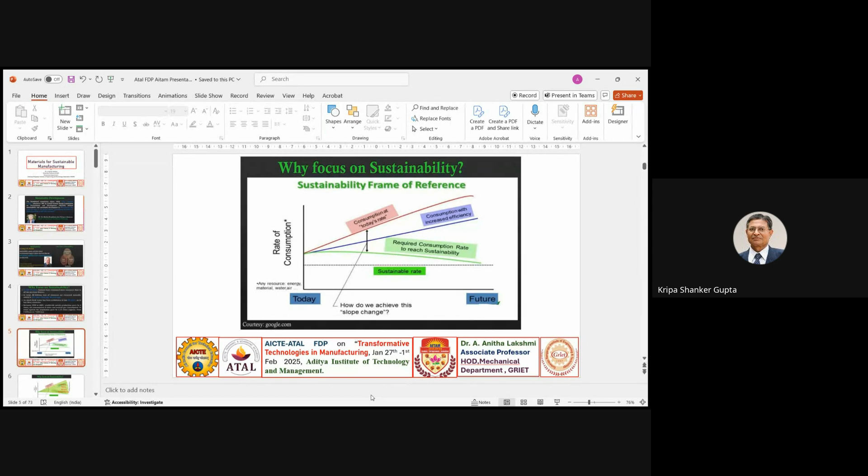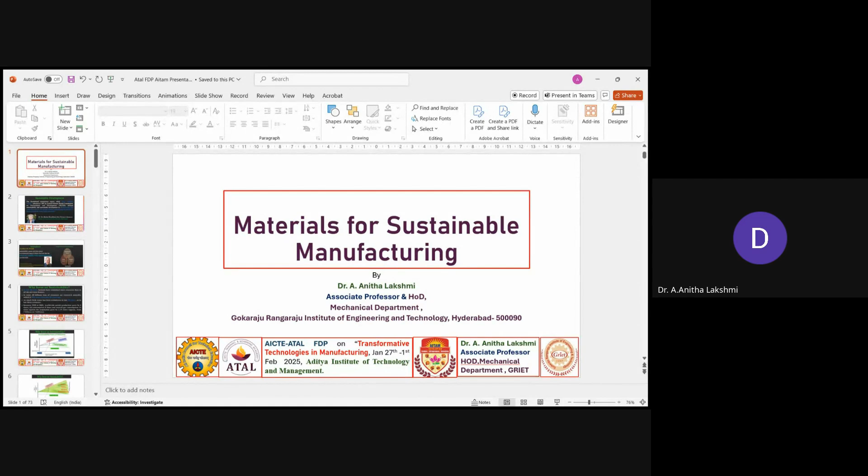So many disturbances. Actually, I also have been facing this with Meet many times. Whenever I present, it creates so many problems. Ma'am, just close it down and open once again. Zoom is much better for PowerPoint. Okay, I'll again keep it in duplicate. Now, can you see? No, it is not changing. So shall I stop sharing? Once again, just close this PPT. Can you see, sir, now? No, please share your screen, ma'am. You have stopped sharing. Can't share your screen. Sorry, an error has occurred when sharing.

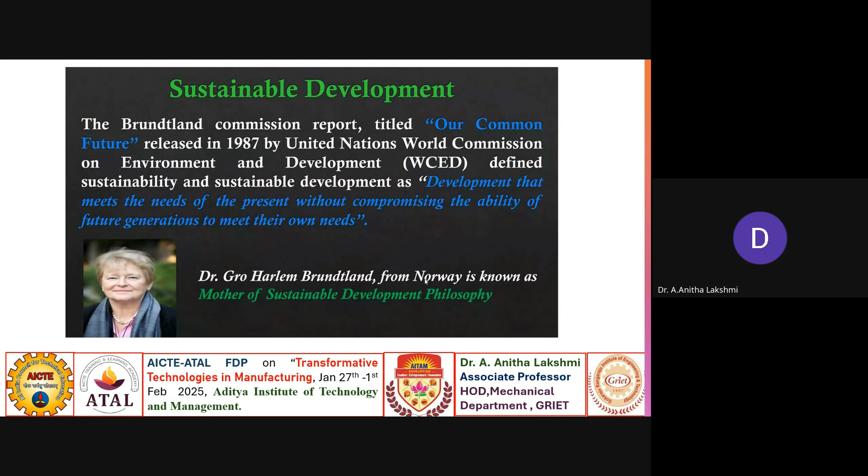Madam, can you send your presentation to Santosh? Yes, sir. That would be better. Just share your PPT to any one of us so that we can change your slides. Okay, sir, I'll share. Santosh, sir, can you give me a hi message? Please share in the resource persons group, ma'am. Okay, that will be better, sir. Shared, sir. I guess all of you are able to see my screen. Yes. Go ahead, ma'am. Can you change to the next slide? Yes, sir.

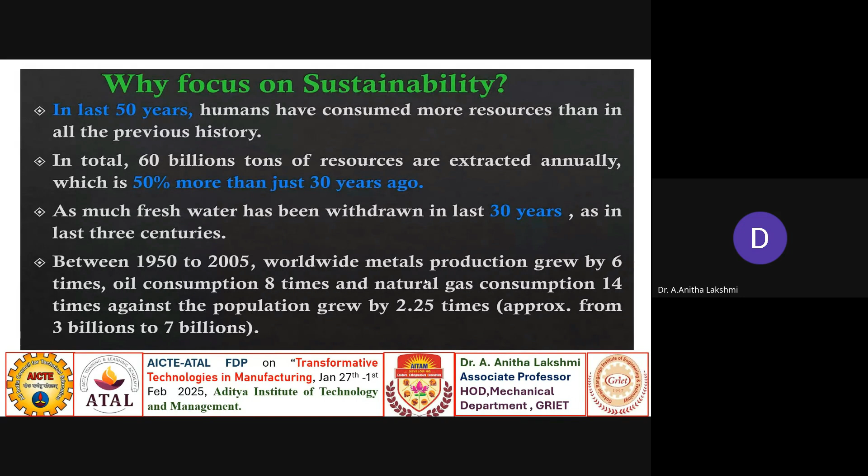So why focus on sustainability? Because we humans are consuming more resources than in previous history, in the last 50 years. A total of 60 billion tons of resources are extracted annually. This is 50% more than just 30 years ago. And fresh water is withdrawn in the last 30 years. And during 1950 to 2005, metals production grew by six times, oil consumption by 8 times, and natural gas consumption by 14 times, against the population, which grew by 2.25 times. So next, sir. Next slide, sir.

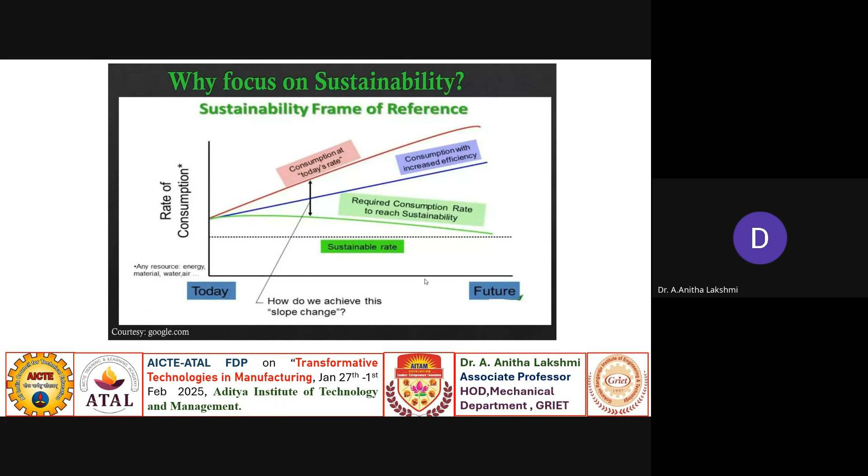So this is a graph, the sustainability frame of reference, where the black dots show the sustainability rate. But as consumption has increased, the red line indicates today's rate. And now, in order to reach sustainability, this is the slope that we need to follow. So this is the gap that one needs to cover. Next one, sir.

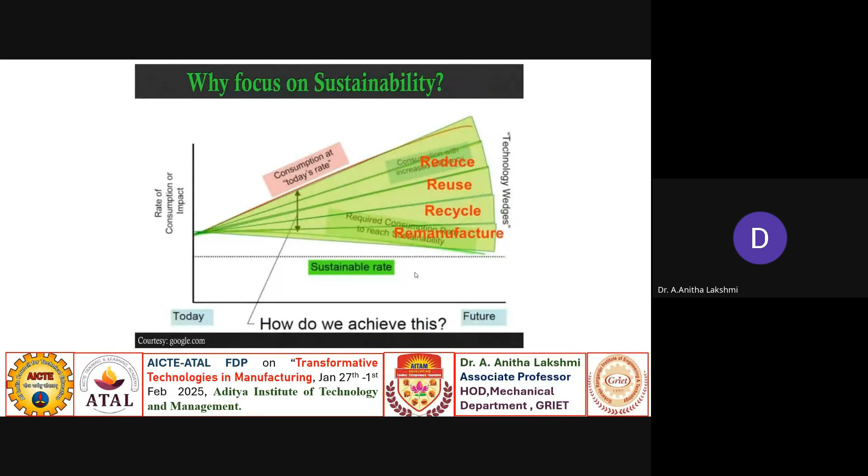So in order to come from this red slope to this green to reach the sustainability rate, we need to use 4 R's, that is reduce, reuse, recycle, and remanufacture. So these are the 4 R's, the technology wedges, that we need to use to follow this sustainability rate. Next, sir.

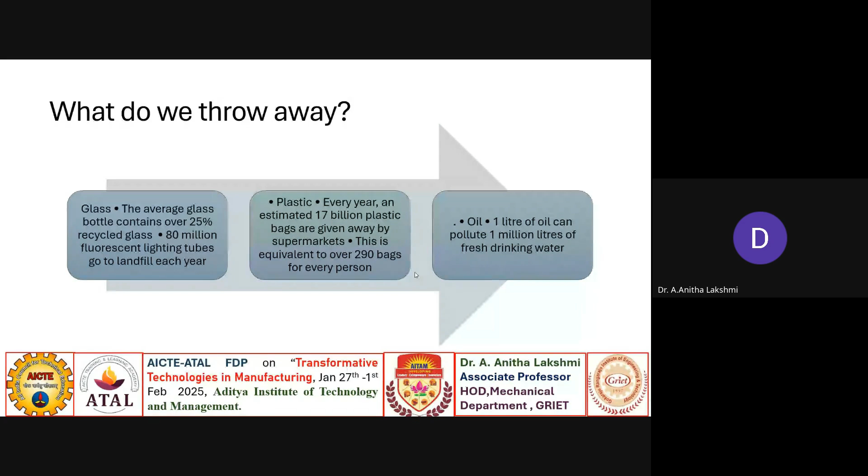Next, sir. So the average glass bottle contains over 25% of recycled glass, and 80 million fluorescent lighting tubes go to landfill each year. And in the same way, plastic, we completely depend upon plastic. Every year, an estimated 17 billion plastic bags are given away. This is equivalent to over 290 bags for every person. And in the case of oil, 1 liter of oil can pollute 1 million liters of fresh drinking water. So this is what we throw away.

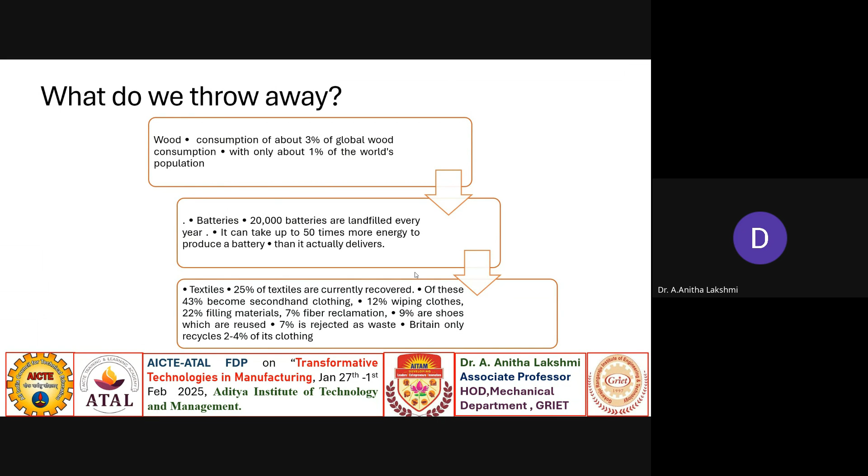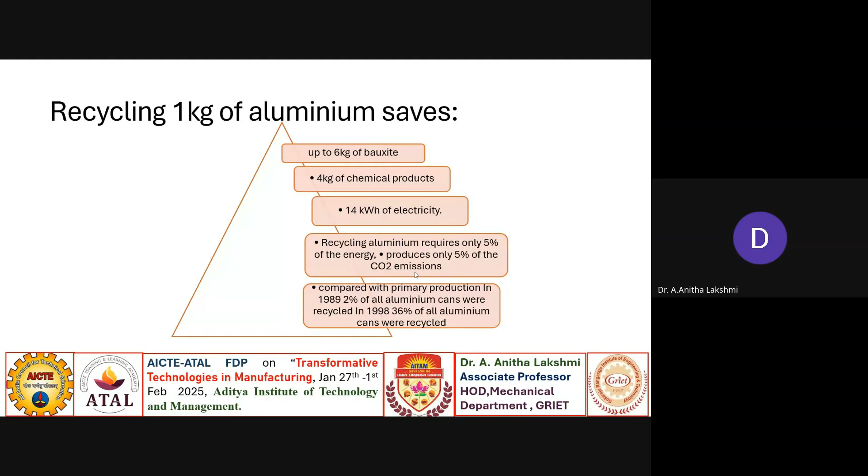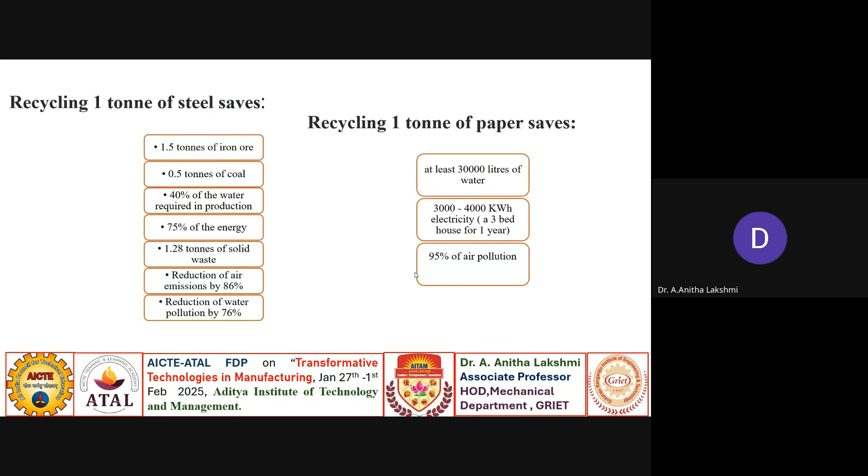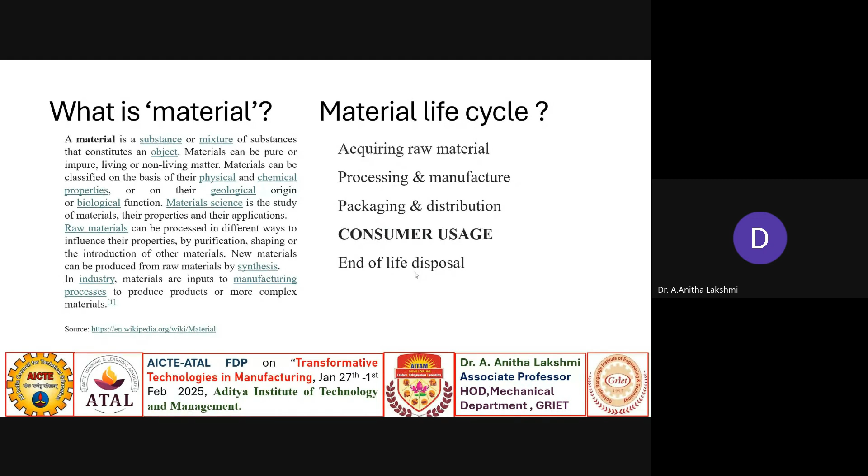So coming to the topic, materials for sustainable manufacturing. What is a material? A material is a substance or a mixture of substances that constitutes an object. This is the definition. Before going further, we have to understand the material life cycle: acquiring the raw material, processing and manufacturing of this raw material, packaging and distribution to the consumer, consumer usage, and end of life disposal. These are the 5 stages of a material.

Next, sir. So what makes a material not eco-friendly? If the raw material is irreplaceable and hard to extract, then it is not eco-friendly. In processing and manufacture, if it is polluting and generates waste. In packaging and distribution, if it is very far from the market, or needless marketing and packaging. In consumer usage, if it has a short product life. And in end of life disposal, if it fills the landfill, then it is considered not an eco material. Next, sir.

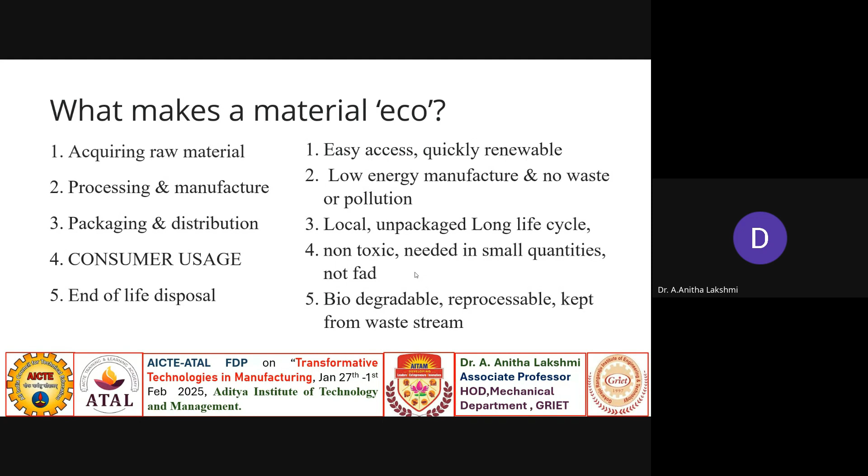So what makes a material eco? The raw material should be easy to access and quickly renewable. In processing, low energy is required for manufacturing, and no waste or pollution. In packaging, local, unpackaged, and long life cycle. In consumer usage, it should be non-toxic, used in very small quantities. And in end of life disposal, it should be biodegradable, reprocessable, and kept from the waste stream. So these are all the features that make a material eco.

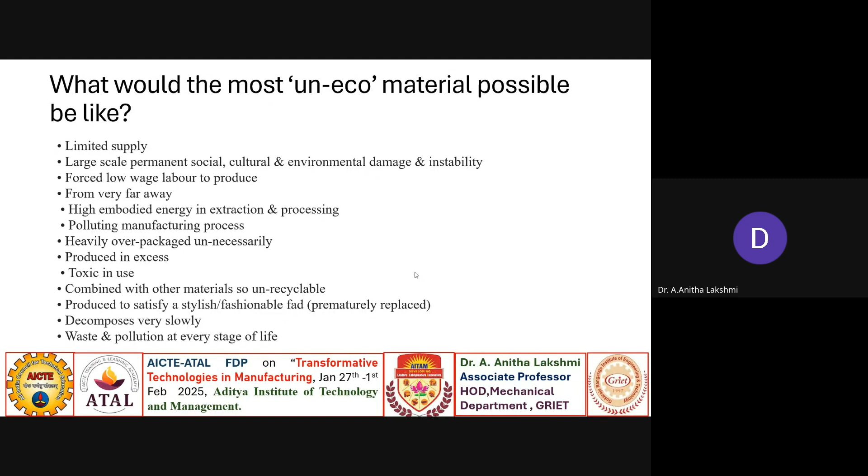So what would be the most uneco material possible? It would be one which has a limited supply and causes large-scale permanent social, cultural, and environmental damage and instability, and needs forced, low-wage labor to produce. And if it needs to be brought from very far away, if it is toxic in use, and if it decomposes very slowly. So these are all the features that make a material uneco. Next, sir.

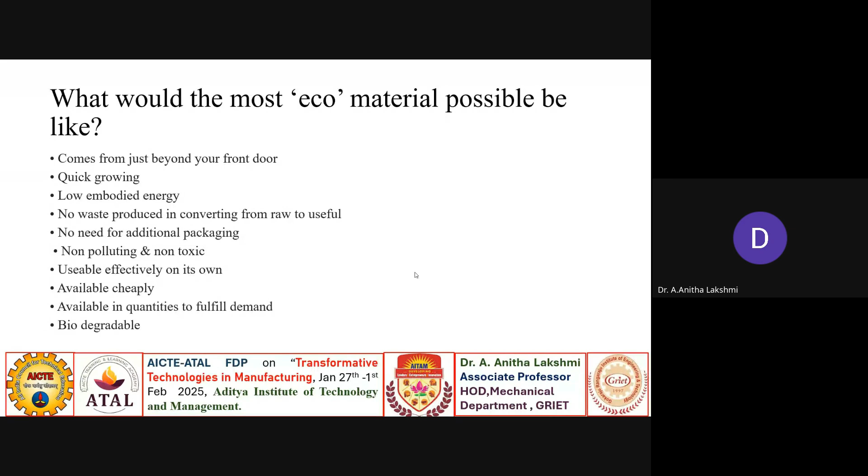So what would an eco material possibly be like? It comes from just beyond your front door, is quick growing, has low embodied energy, no waste produced in converting from raw to useful, no need for additional packaging, is non-polluting and non-toxic, and, most important, biodegradable. So all these features make the material eco-friendly. So next.

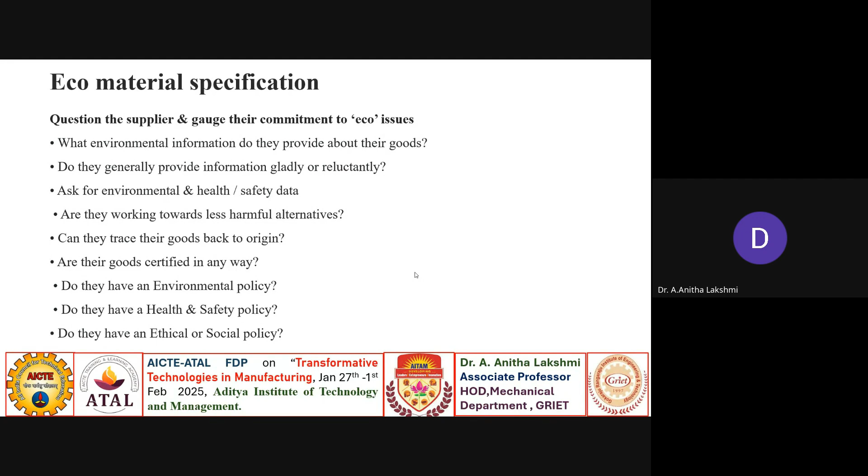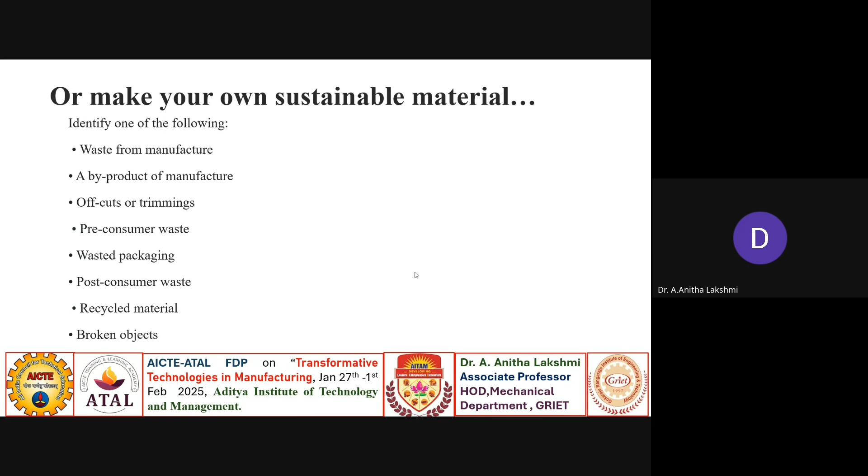Or we can make our own sustainable material. We have to look at waste from manufacture, a byproduct of manufacture, offcuts or trimmings, pre-consumer waste, wasted packaging, post-consumer waste, broken objects. So these are all the ones which we can identify as sustainable materials. Next, sir.

Now we can see how plastic waste is recycled into roads and many other things. This is one example where Aboul-Enein et al. have carried out the synthesis of carbon nanotubes via pyrolysis of different types of plastic waste. These are the different types of plastic waste they collected, and they used a two-stage process to get these carbon nanotubes from the plastics.

Here, hydrocarbon gases, liquid and char were produced by thermal degradation of this waste. The yield of the gaseous products depends on the type of plastic waste, like low-density polyethylene, HDPE and single-use plastic. So they found that low-density polyethylene is more suitable for getting these carbon nanotubes. This is now in use.

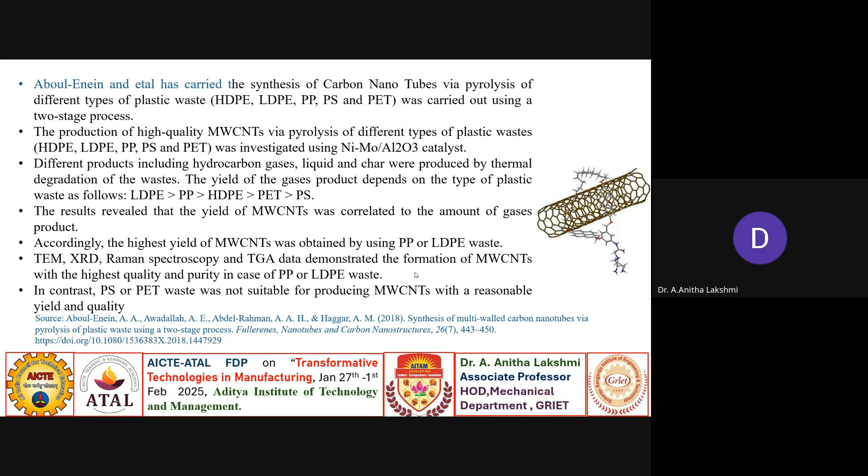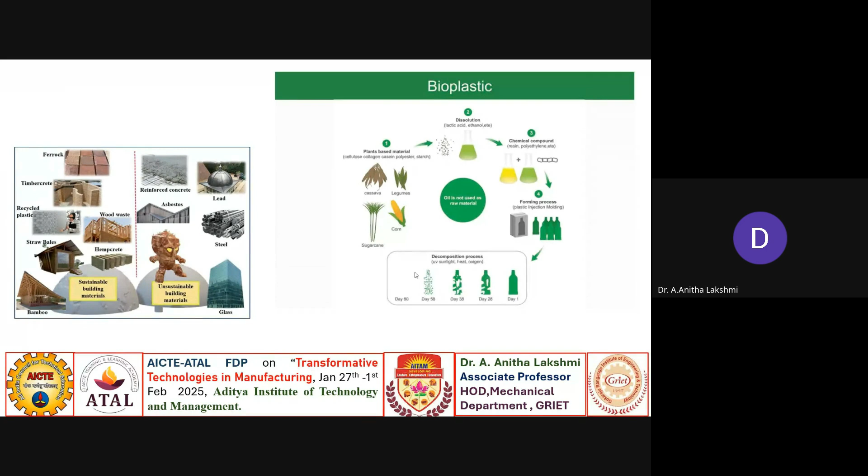Next, sir. So now going forward, this is about the sustainable materials. Now going forward, why sustainability in manufacturing? Manufacturing is the most resource-intensive of all human activities. This accounts for 21% of GDP, and India is also expected to increase the share of manufacturing in the overall economy to 25% by 2025 from the current 16%. So sustainability in manufacturing is required.

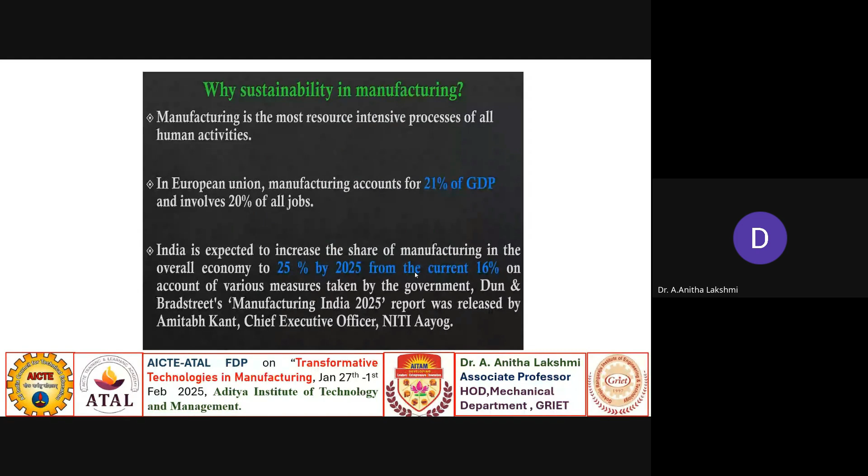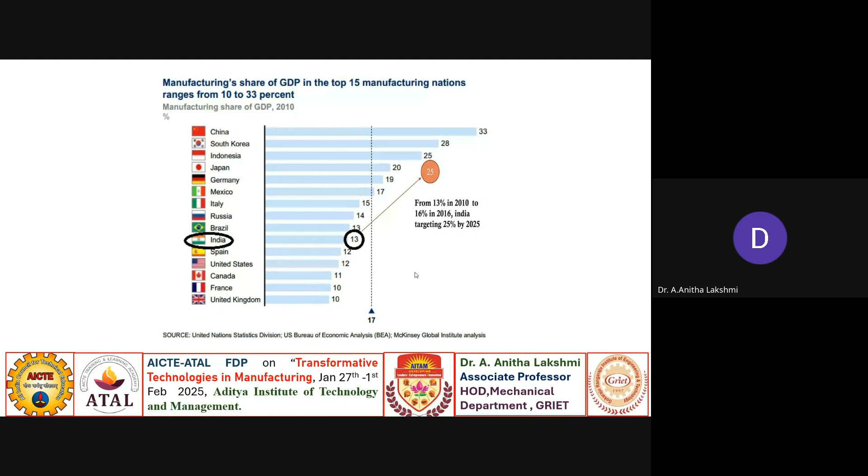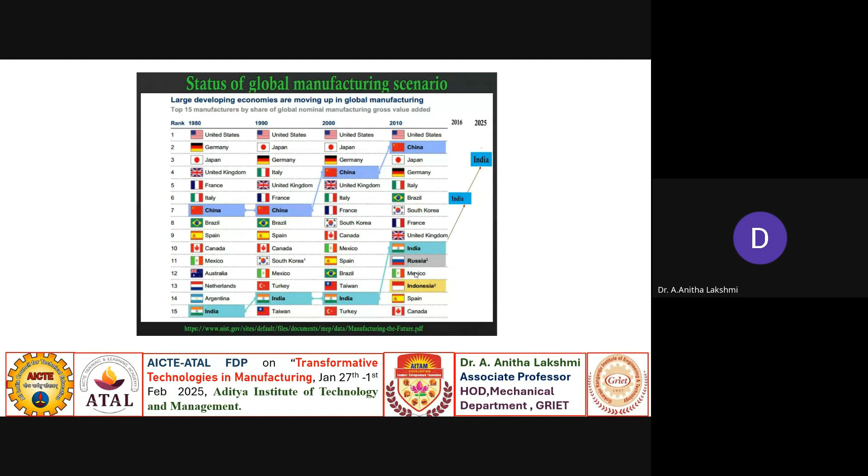Next. So this is, you can see that in 2010, from 13% to 16% in 2016, and it is targeting 25% by 2025. This is the manufacturing share of GDP in the top 15 manufacturing nations. Next, sir. So this is the global manufacturing scenario, where by 2025, how India is ranking globally. Next, sir.

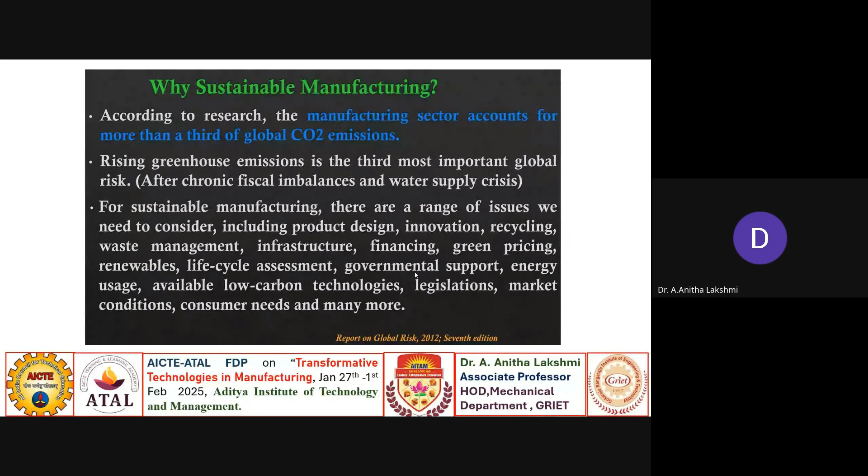So why sustainable manufacturing? Because the manufacturing sector accounts for more than a third of global CO2 emissions. Rising greenhouse emissions is the third most important global risk. For sustainability in manufacturing, there are a range of issues we need to consider, like product design, innovation, recycling, waste management, infrastructure, financing, etc. These are the many things that we need to consider for sustainable manufacturing.

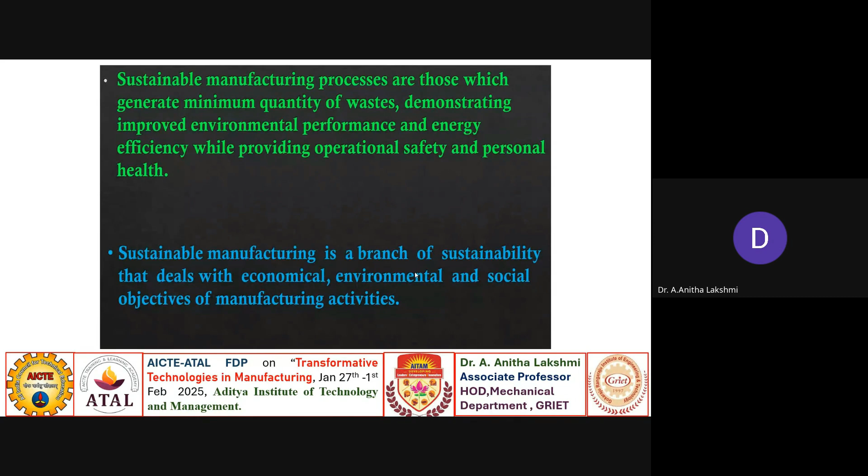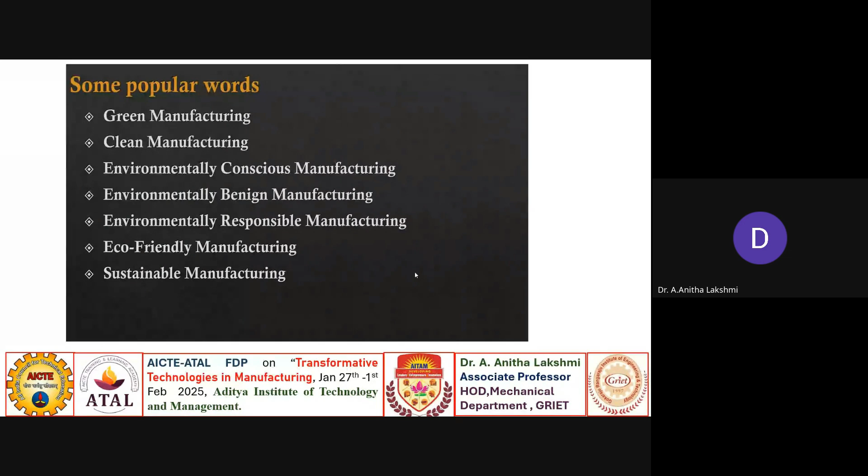So next. These are the popular words in sustainable manufacturing, like green manufacturing, clean manufacturing, environmentally conscious manufacturing, environmentally benign manufacturing, environmentally responsible manufacturing, eco-friendly, and sustainable manufacturing. These are popular words being used nowadays whenever we are going to get any product.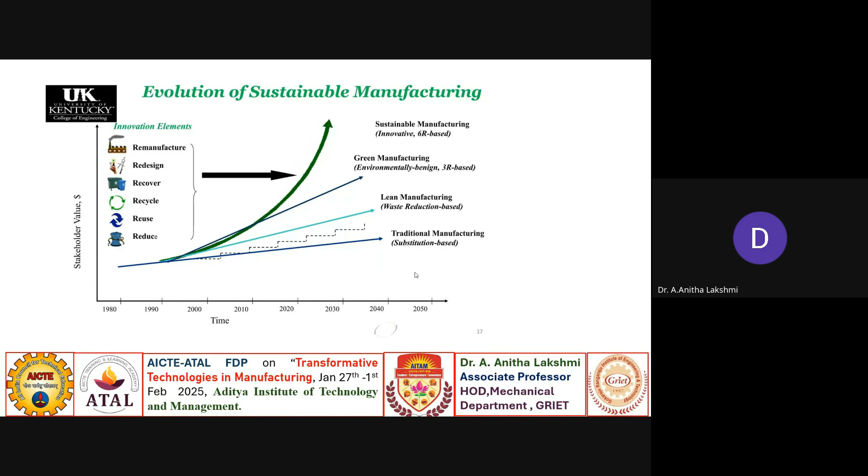Now comes sustainable manufacturing, which is innovative, and it is 6R based. 6R means remanufacture, redesign, recover, recycle, reuse, and reduce. So taking all these 6 R's into consideration and getting a product is sustainable manufacturing. Next.

So this is the manufacturing share of GDP, where the innovative 6R-based sustainable manufacturing practices are based, and it is Industry 4.0, which is known as cyber-physical systems, where it has been involved. Next, sir.

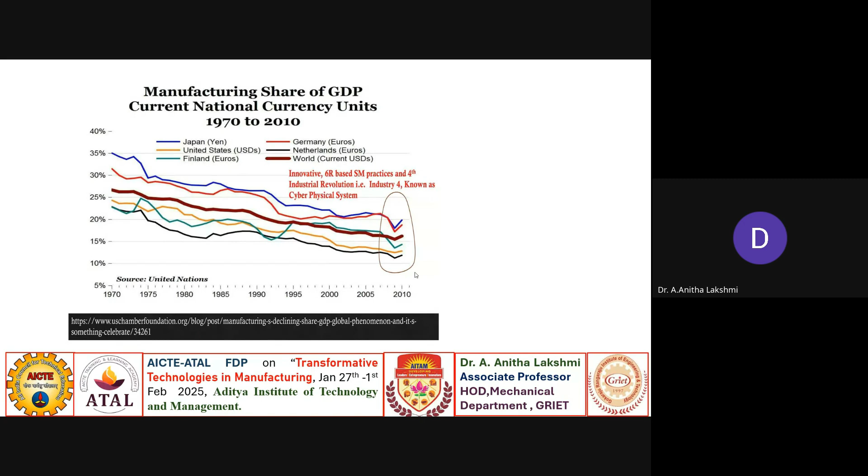Sustainable manufacturing is measured and evaluated using 6 sustainability criteria: manufacturing cost, energy consumption, waste management, operational safety, personnel health, and environmental impact. So these 6 criteria are used. The basic objective of sustainability is to minimize manufacturing cost, minimize energy consumption, reduce environmental impact, improve personnel health, improve operational safety, and improve waste management practices. These are all the objectives.

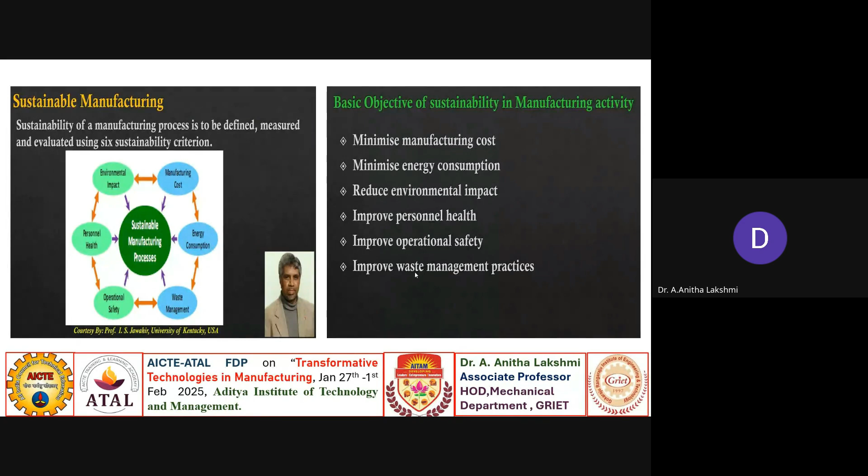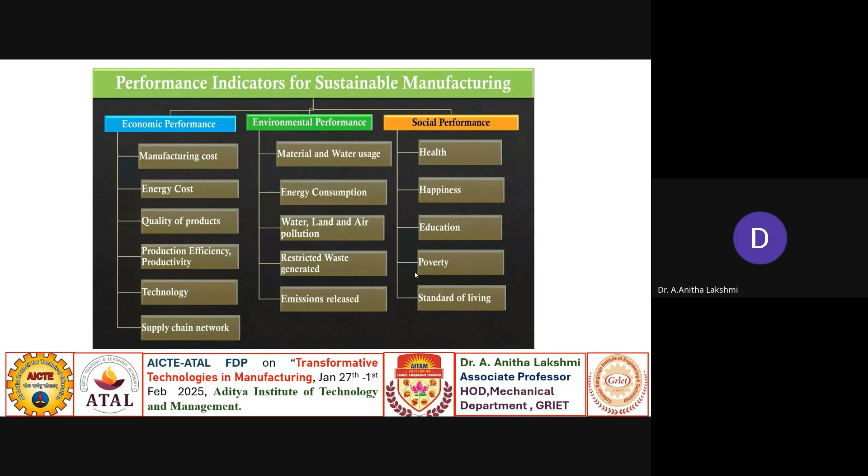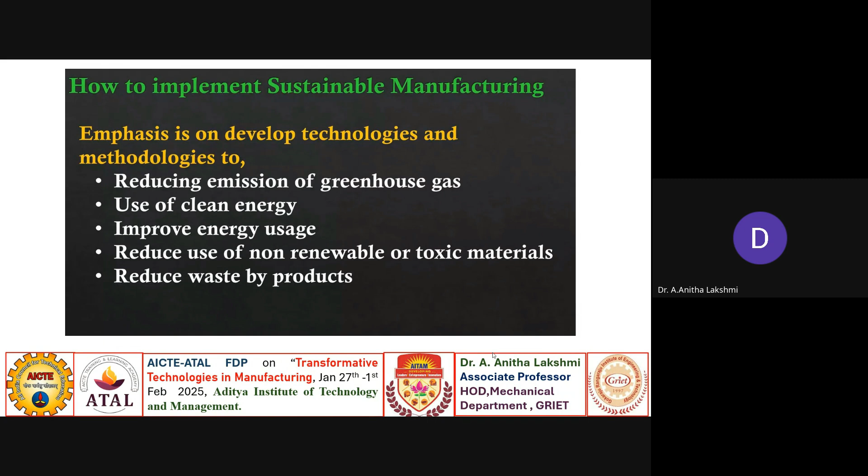So now, how to implement sustainable manufacturing. It relies mostly on developing technologies and methodologies for reducing the emission of greenhouse gas, use of clean energy, improving energy usage, reducing use of non-renewable or toxic materials, and reducing waste byproducts. Next, sir.

So how to implement sustainable manufacturing? There are five ways we can implement sustainable manufacturing, from generally easier to more difficult: improvements in work practices, then process optimization by making adjustments to the processes to increase efficiency, then raw material substitution, like shifting to more environmentally sound inputs,

then implementing new technologies enabling less resource consumption, waste generation, and emissions, and new product designs to minimize impacts throughout the product life cycle. So this goes from generally easier to more difficult. These are the ways to implement sustainable manufacturing. Next, sir.

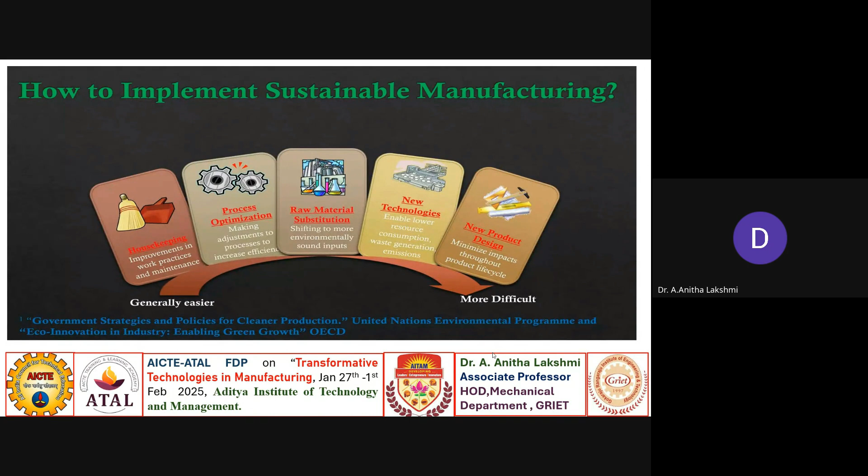Sustainable manufacturing in practice involves using renewable materials that don't deplete the natural environment, and using fewer materials and inputs that are non-hazardous or recycled.

It also involves modifying production processes to use low energy, water, and materials to produce less waste, using less packaging, lowering product weight, using more efficient transportation and logistics, and designing the product to be reusable, remanufacturable, recyclable, or biodegradable. These are the four things we need to take care of when designing the product.

Then, expanding the life of the product by making it easier to repair or designing it to use fewer resources during use, and working with stakeholders like customers and retailers to reduce the environmental impact of sales and distribution. This is how sustainable manufacturing is practiced.

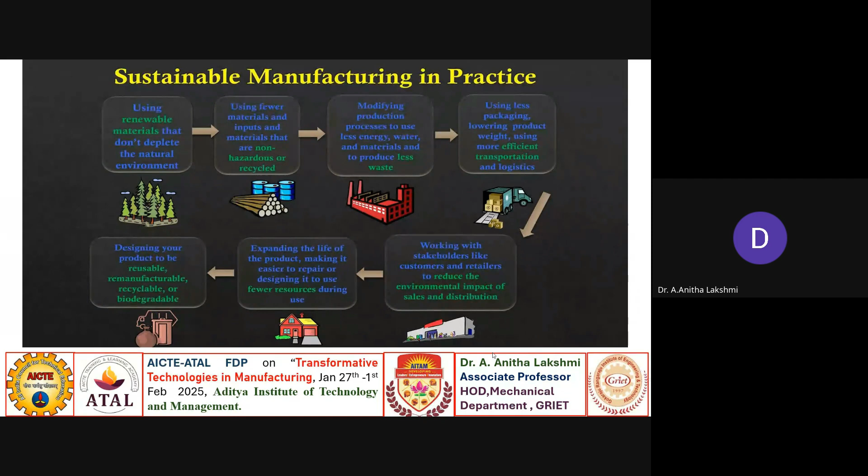Now we'll see a few cases of how sustainable manufacturing practices take place.

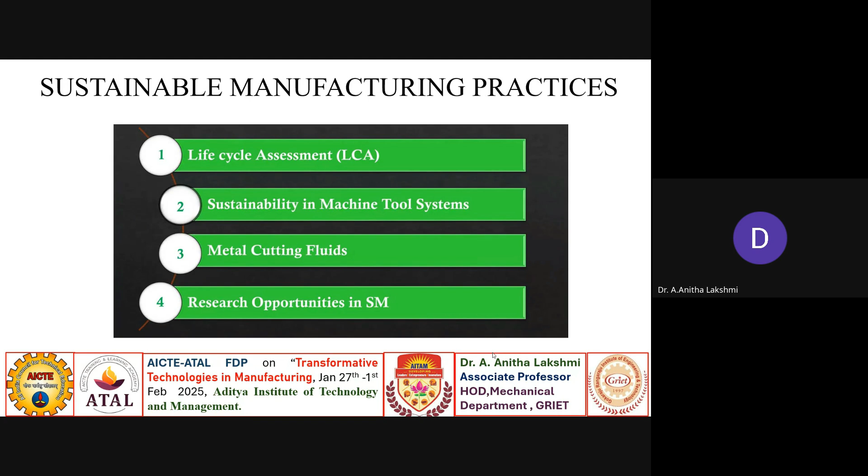This is life cycle assessment. It is an environmental management tool that enables the quantification of environmental burdens and their potential impacts over the whole life cycle of the product, process, or activity, such as identifying opportunities to improve the environmental performance of a product at various stages of its life cycle.

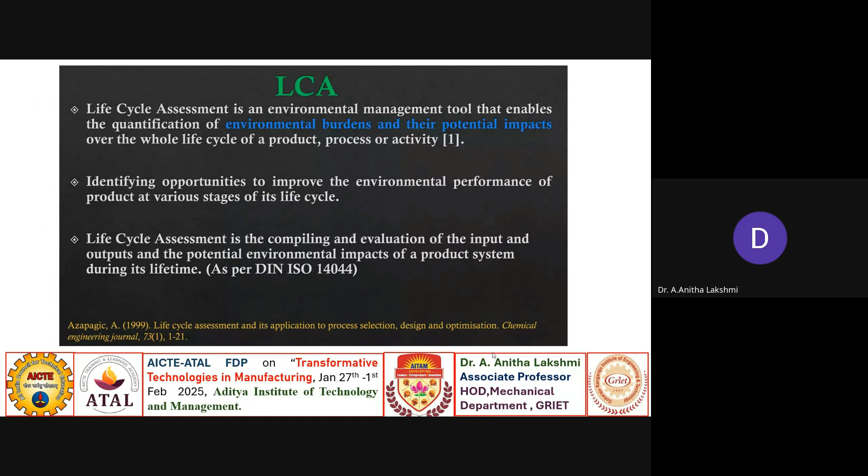This shows the stages of a product life cycle: raw materials are transported to the industry where manufacturing is done, then packaging, transportation, distribution, and supply chain delivery to the user for consumption. After usage, the product may be reused, recycled, remanufactured, disposed of, or incinerated, and natural resources are taken again for further manufacturing.

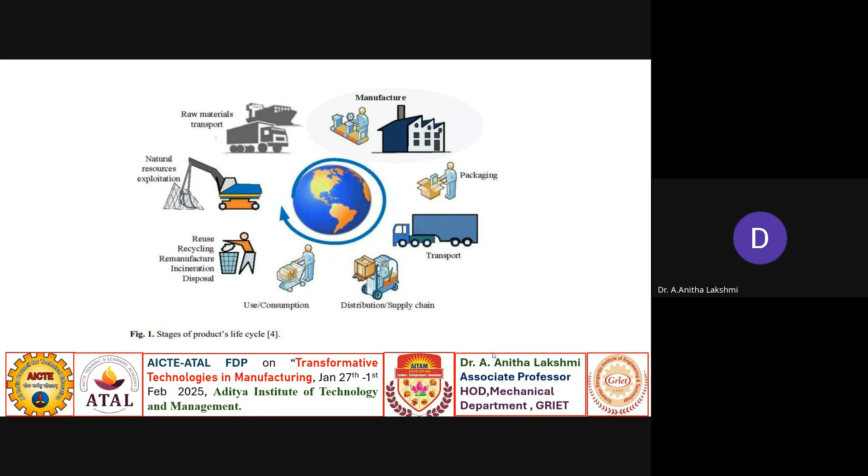This is the example of lamps, showing transportation, bulk material manufacturing, LED packaging, and use. In incandescent lamps, usage is more; then halogen lamps; then CFL and LEDs, with LEDs in 2015 showing reduced use. This is what we can see here.

Madam, is your focus on materials or sustainable manufacturing? On materials and sustainable manufacturing, sir.

Okay, material and sustainable manufacturing. Going back to the previous slide - what does this graph show? There are different types of lamps here, and the use has been reduced, from the energy consumption by the bulb only. This is the energy consumption. Is it industry application, manufacturing application, or home application? We are taking into consideration the manufacturing application, sir.

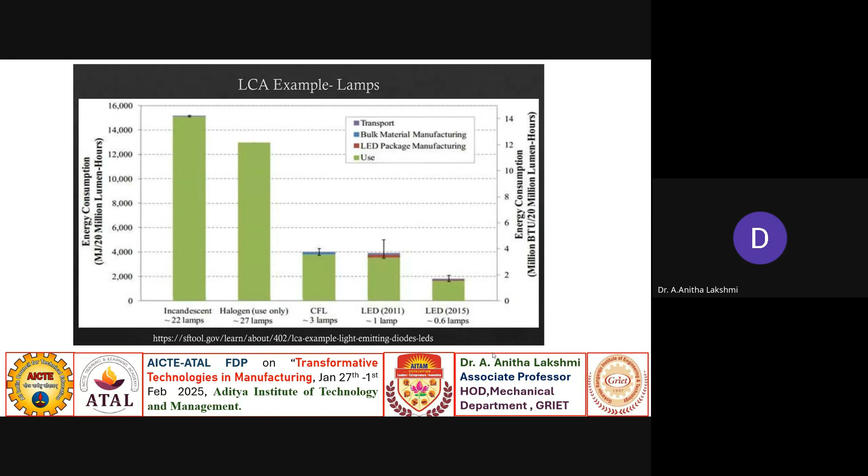Here the energy consumed during production, in the example of cloth: making of yarn, making of the individual product, or marketing of the product consumes 18% energy. During use, water consumption, either hot or cold, accounts for 79.5%, and making the detergent uses 2.5%. This is the case for clothing.

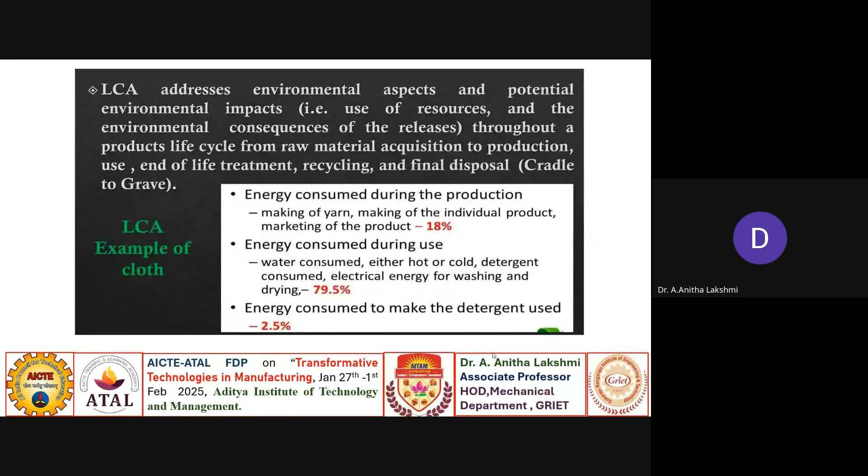This is the life cycle assessment of biodiesel production. CO2 emissions are shown on the y-axis, and petroleum diesel on the x-axis, along with biodiesel blends B20 and B100. We can see the reduction in carbon dioxide emissions with the biodiesel blends.

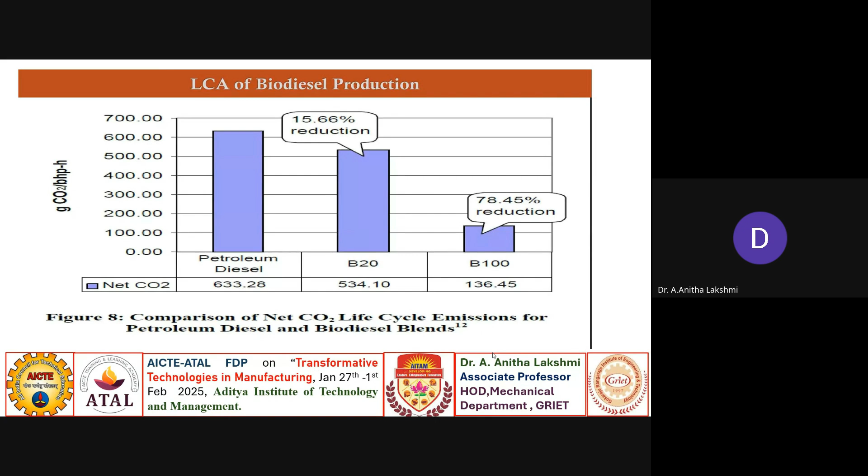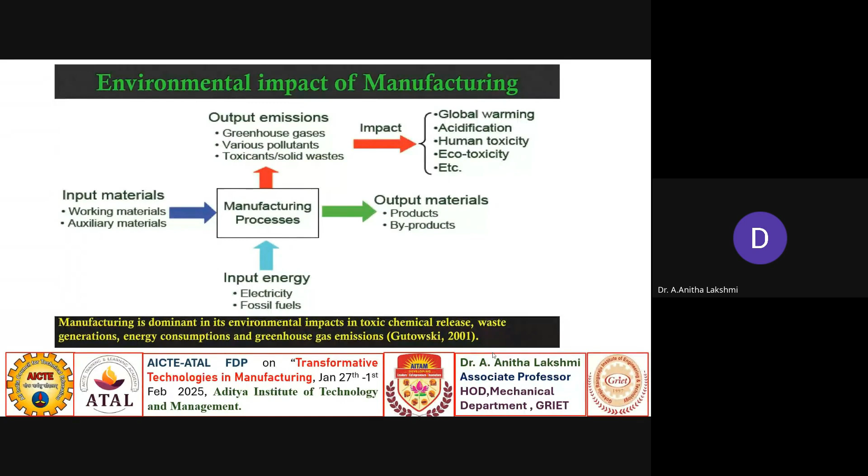So the environmental impact of manufacturing: this is the auxiliary working material and the manufacturing processes where materials are input, and the output materials will be the products and byproducts, and the input energy will be electricity and fossil fuels. The output emissions will be greenhouse gases, various pollutants, toxicants and solid wastes. These have an impact causing global warming, acidification, human toxicity, ecotoxicity, etc. So this is the environmental impact of manufacturing.

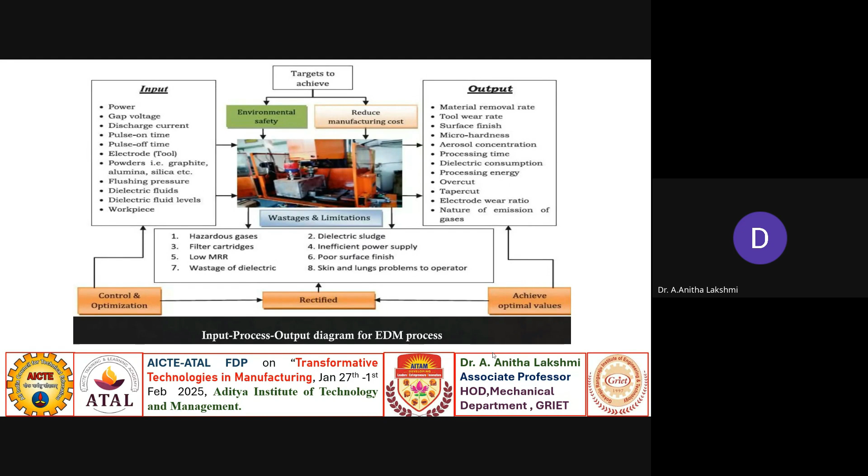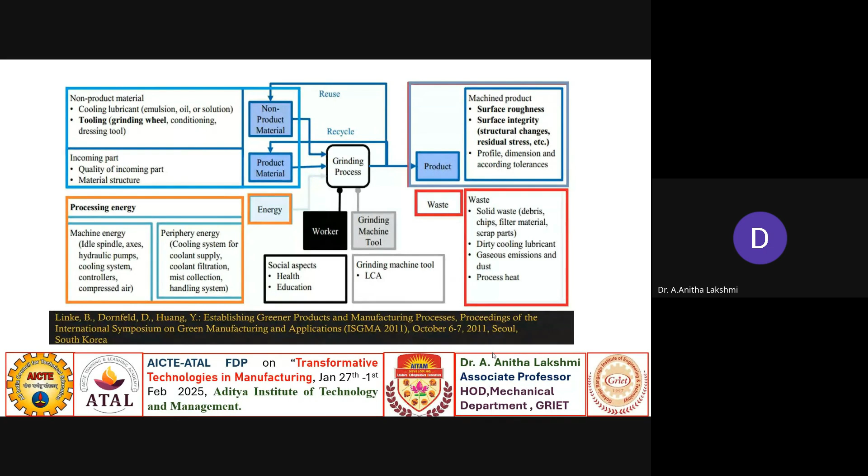And the tooling will be the grinding wheel. The incoming part will be the quality, like material structure and quality of incoming part, the consideration in the product material. And here the machined product will be having surface roughness, surface integrity, profile dimensions, etc. will be measured. And the waste, like debris, chips, filter material, etc., and dirty cooling lubricant, gaseous emissions, and process heat. So these are all the different parameters in the grinding process.

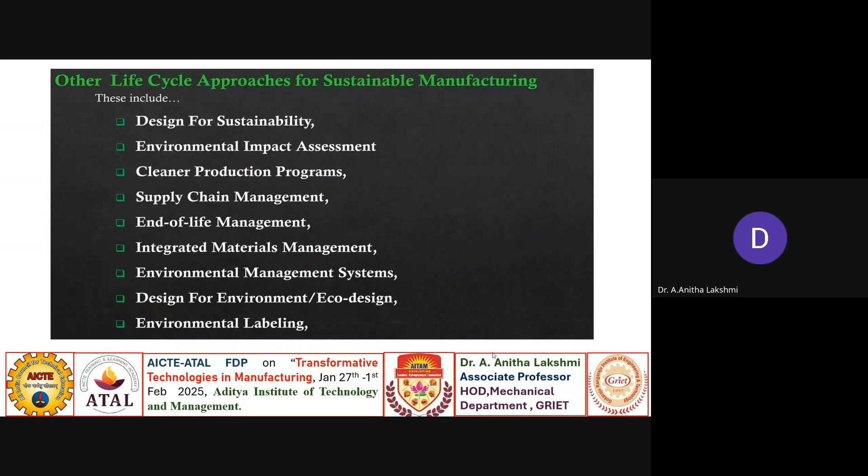Other life cycle approaches for sustainable manufacturing are design for sustainability, environmental impact, cleaner production programs, supply chain management, end of life management, integrated materials management, environmental management, and design for environment and environmental labeling. So these are all the other life cycle approaches.

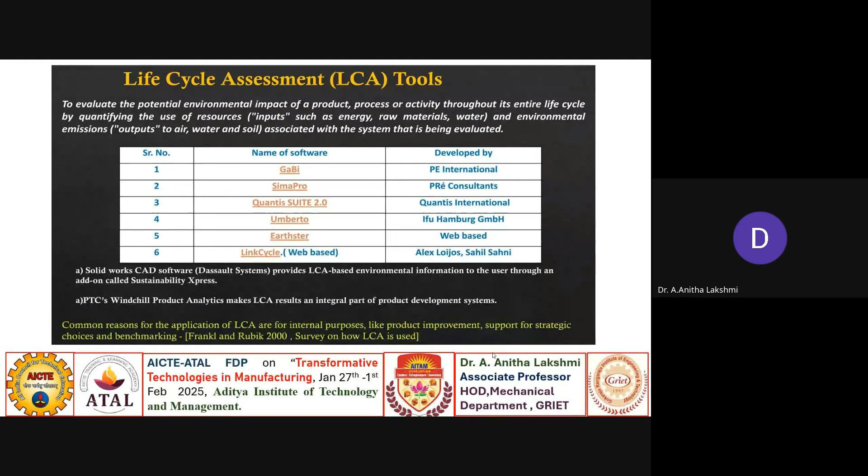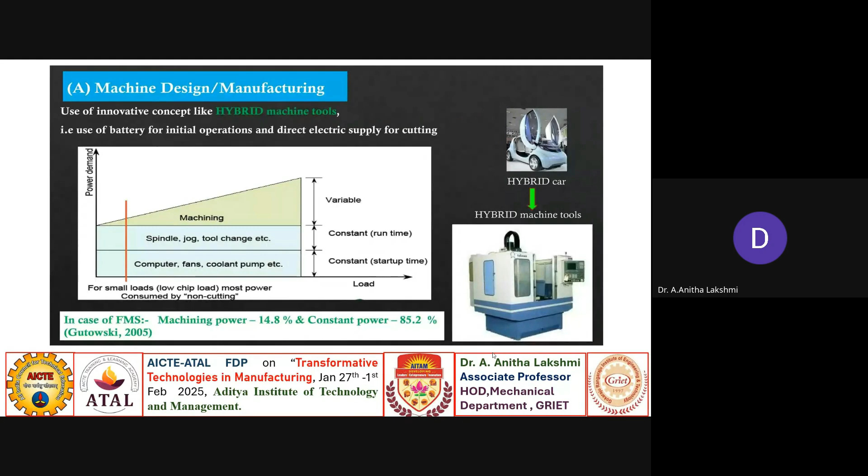Sorry - it's okay. Should I keep that slide, ma'am? It's okay, sir. For your kind reminder, we have the last 10 minutes now. Yeah, 10 minutes time, sir.

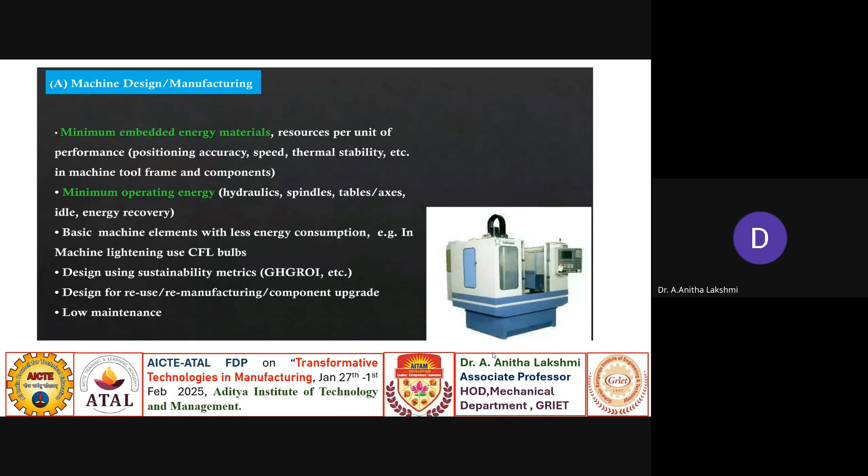So I will go a little bit quick. This is machine design and manufacture - we use machine elements like CFL bulbs for conserving energy, and design using sustainability metrics. For reuse, we design the component for reuse, remanufacturing, and component upgrade, and you will have low maintenance.

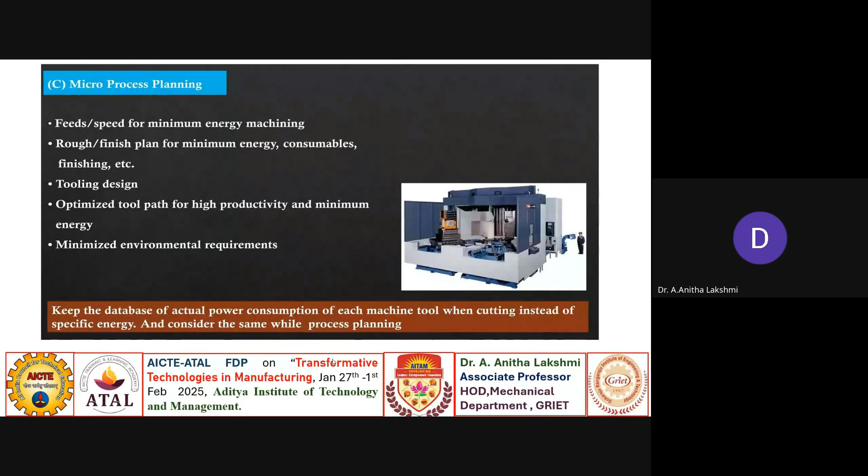And micro process planning: controlling the feeds and speeds for minimum energy machining, rough and finish planning for minimum energy consumables, finishing, tooling design, and carrying an optimized tool path for high productivity and minimum energy, minimizing environmental requirements.

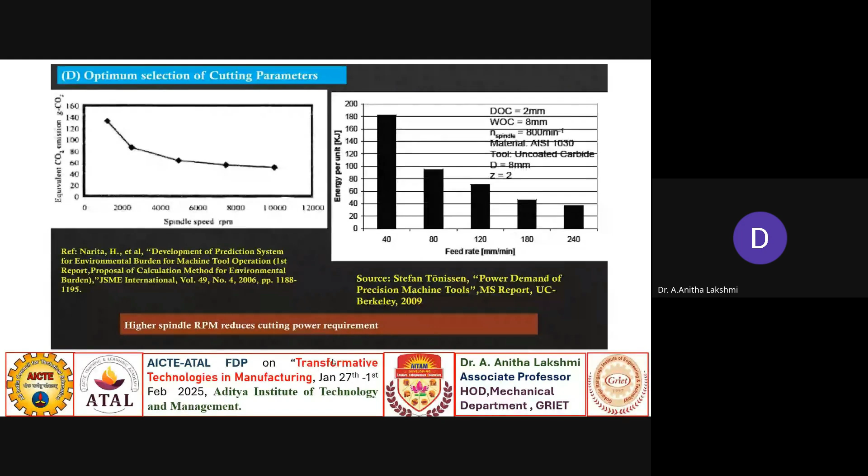By optimum selection of cutting parameters, the CO2 emissions have decreased with spindle speed increase. And here you can see the energy with respect to feed rate - the energy consumed is decreased with optimizing the change in feed rate.

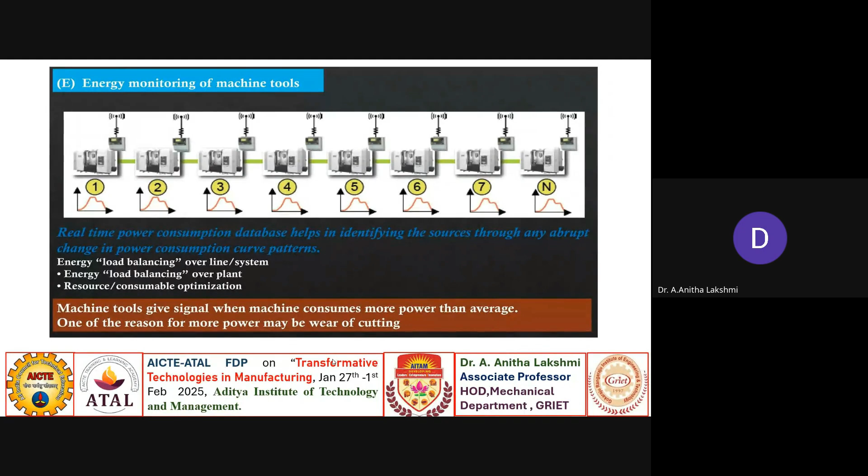This is how real-time energy monitoring of machine tools is done for load balancing over the line of system or over the plant, and resource or consumable optimization. This is how the online energy monitoring of machine tools is done.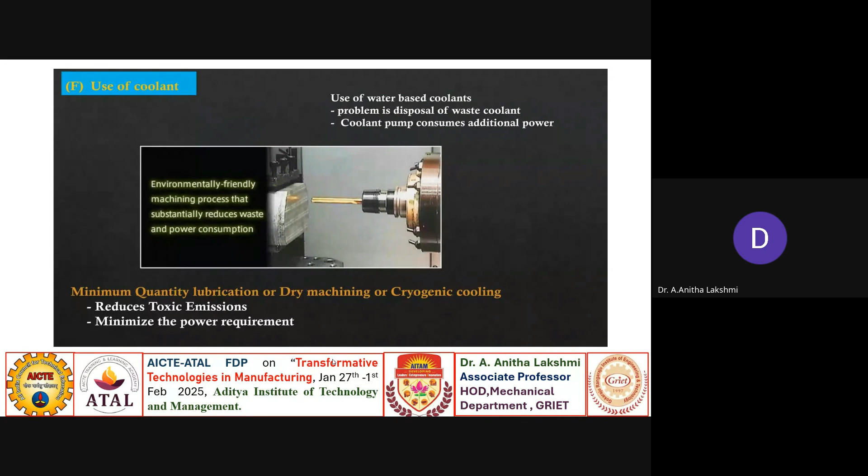These are the three areas used for reducing toxic emissions and minimizing power requirement. Minimum quantity lubrication is called MQL.

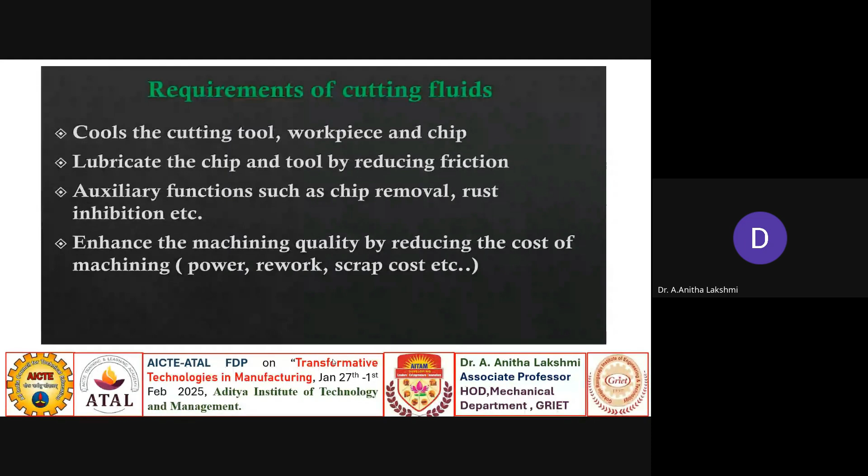They are highly vulnerable to microbial contaminants. Mist and vapor generated are harmful for the operator, causing lung diseases, and direct exposure may lead to skin diseases and respiratory-based diseases. So these are the issues and problems.

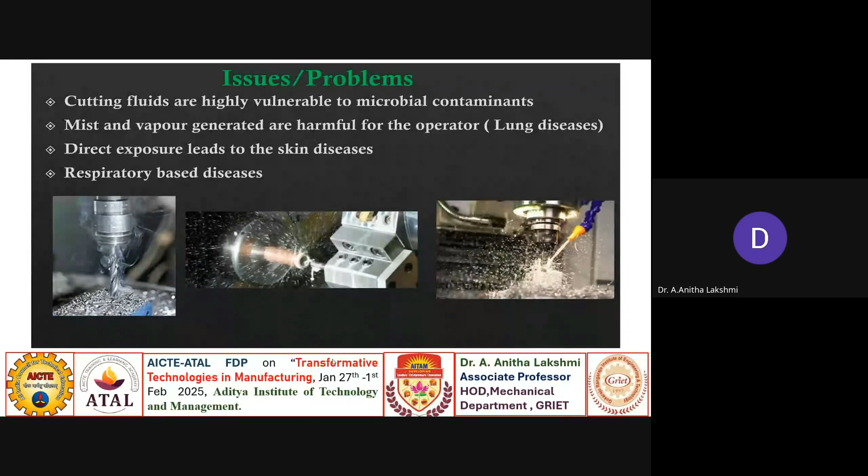Cutting fluid consumption is estimated at more than 100 million gallons per year in the US. The total cost of purchasing and disposal is more than $48 billion, and disposal and recirculation forms a major share of the cost. Here you can see the tool cost and the cutting fluid cost - the cutting fluid cost is more compared to the tool cost.

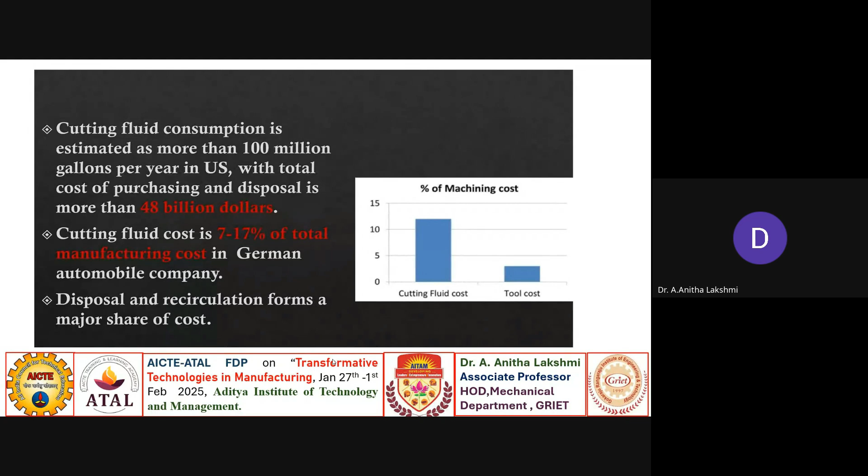This is how sustainability is increasing with coolants - petroleum-based metal working fluids, minimum quantity lubrication, vegetable oil-based fluids, use of nanoparticle-based coolants, and dry cutting. These are the different ways sustainable solutions are provided.

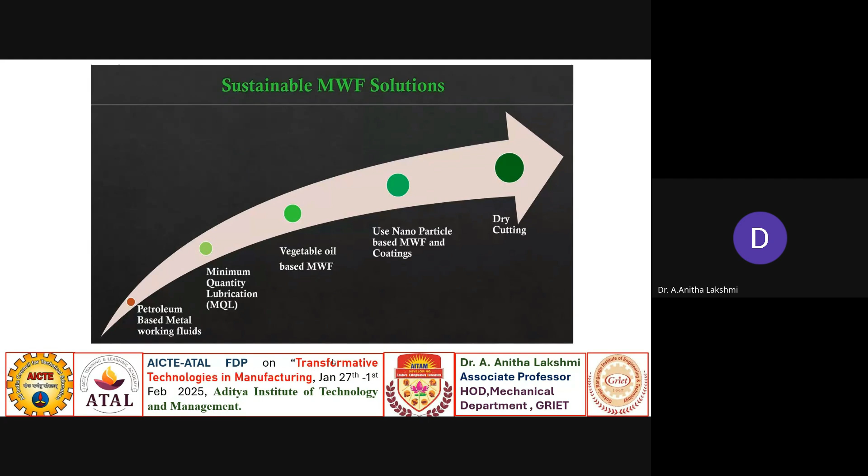This is how MQL with nanoparticle-added cutting fluids - how sustainability is being incorporated here.

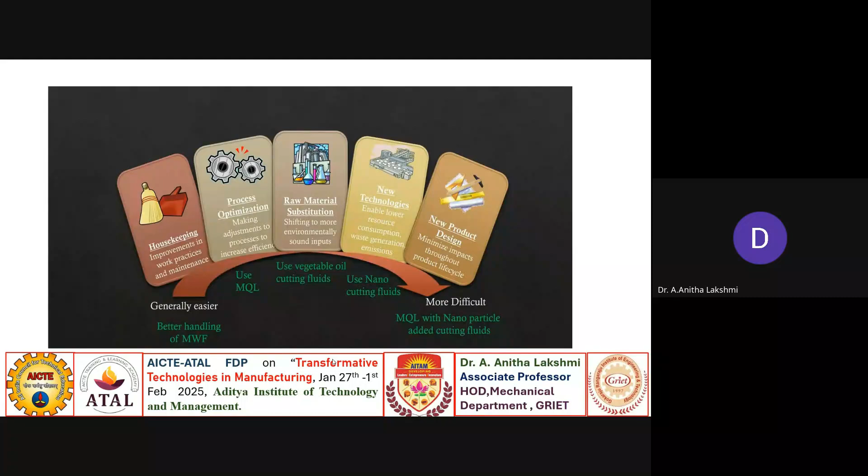This is minimum quantity lubrication. This is called MQL cooling, and this is flood cooling, where more coolant is used. In minimum quantity lubrication, the coolant is applied with force, but a very less amount of coolant is used.

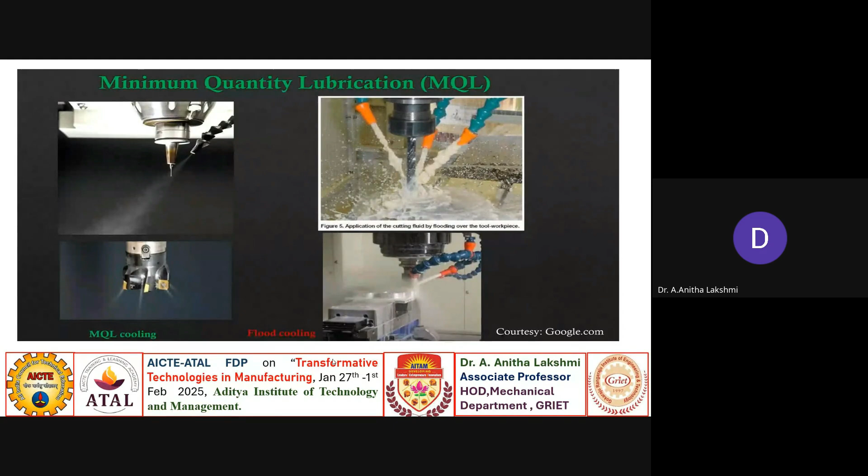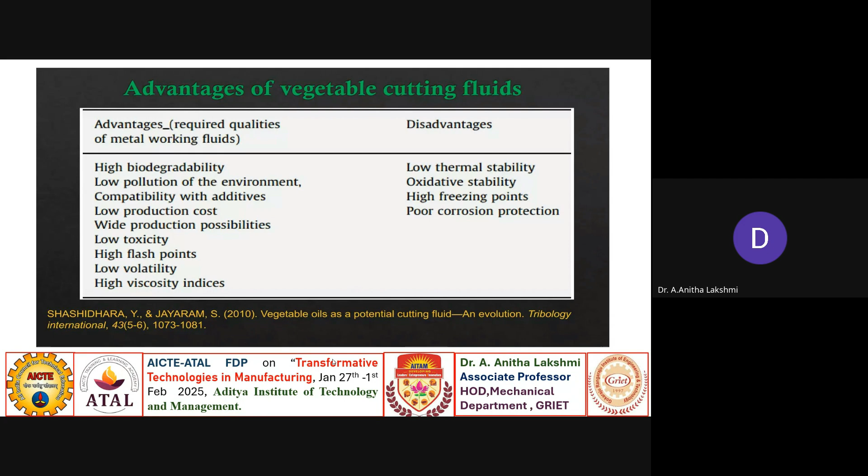These are different types of vegetable-based cutting fluids. Their advantages include biodegradability, low pollution of the environment, etc.

These are the research opportunities in cutting fluid technologies, like development of new vegetable oil-based cutting fluid and minimum quantity cutting oil, nanoparticle mixed, and petroleum and vegetable cutting oils.

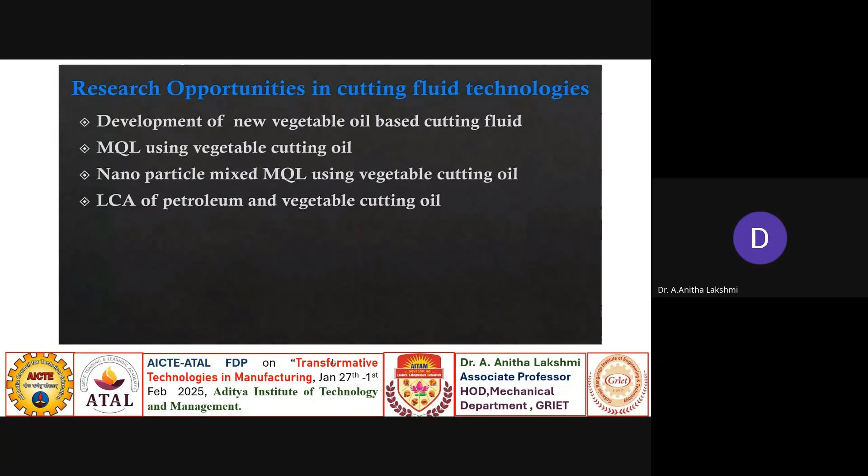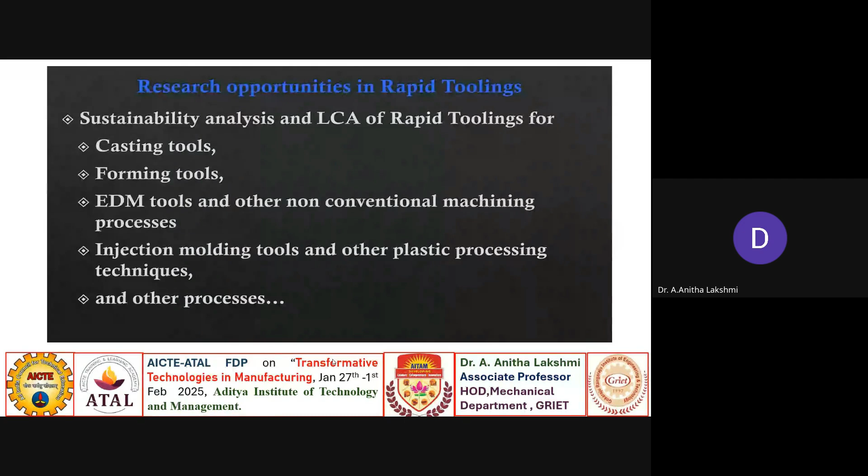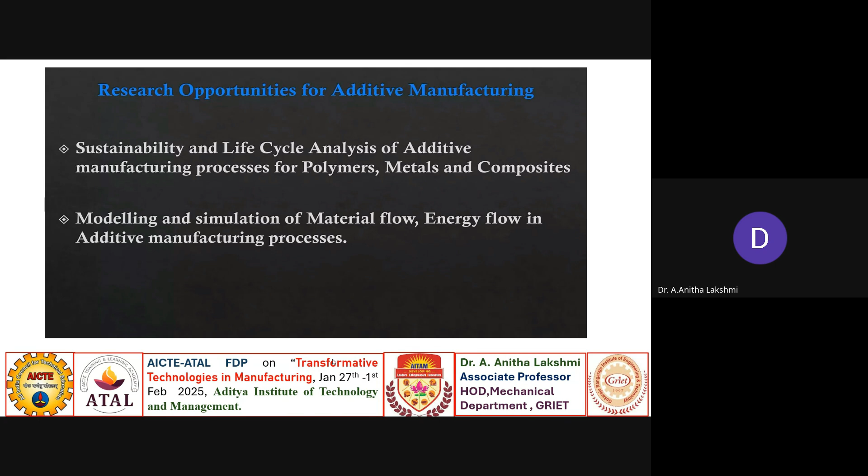These are research opportunities in rapid tooling, like in casting tools, forming tools, EDM tools, injection moldings, and other processes. In additive manufacturing, there is life cycle analysis for polymers, metals, and composites, and modeling and simulation of material flow and energy flow. Applying sustainability in these areas presents many research opportunities.

This is the end of my presentation. Thank you everyone. Actually, I am in a rush, so I couldn't give more detail. At the ending, there are case studies where I am unable to give much presentation on this.

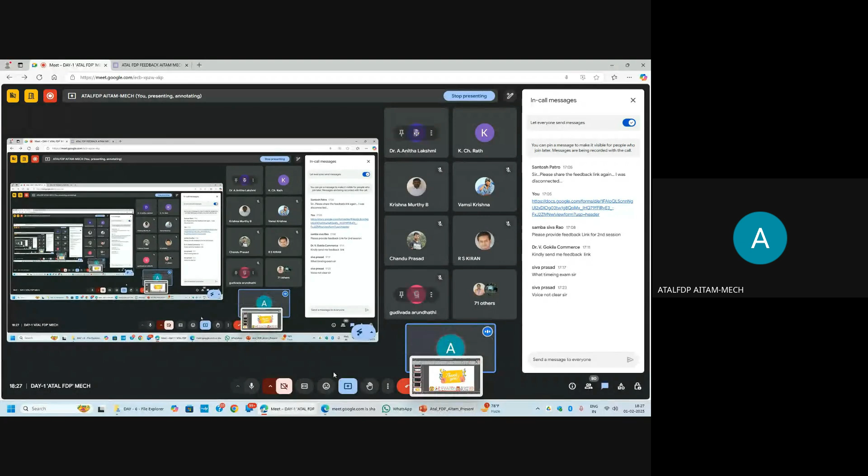Madam, why is sustainability required? Though manufacturing is going in the right direction, why does the question arise on sustainability? Sir, because the material requirement is one thing, and the energy; the material again goes into the energy consumption. So now sustainability is much more important. Whatever manufacturing is taking place, the usage is also becoming higher and higher with the increase in population.